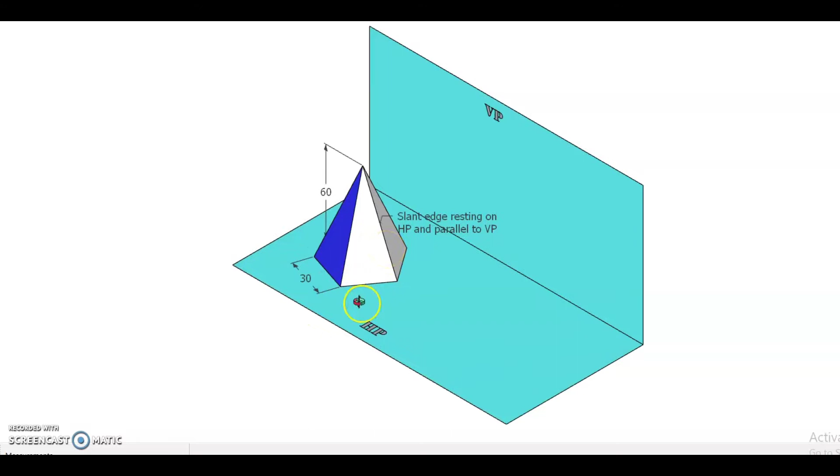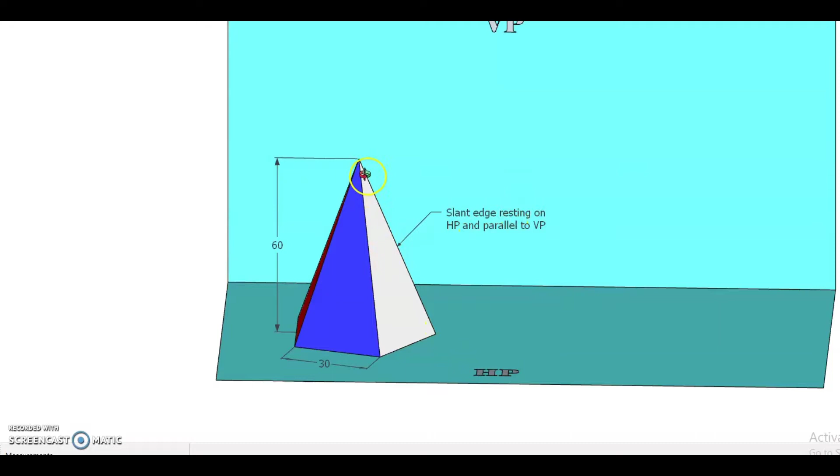Now consider a pentagonal pyramid of which the base side is 30 millimeter and axis height is 60 millimeter. It is inclined to HP in such a way that this slant edge is fully resting on HP. While resting on HP, it should be parallel to VP. So in final condition, this will appear like this one.

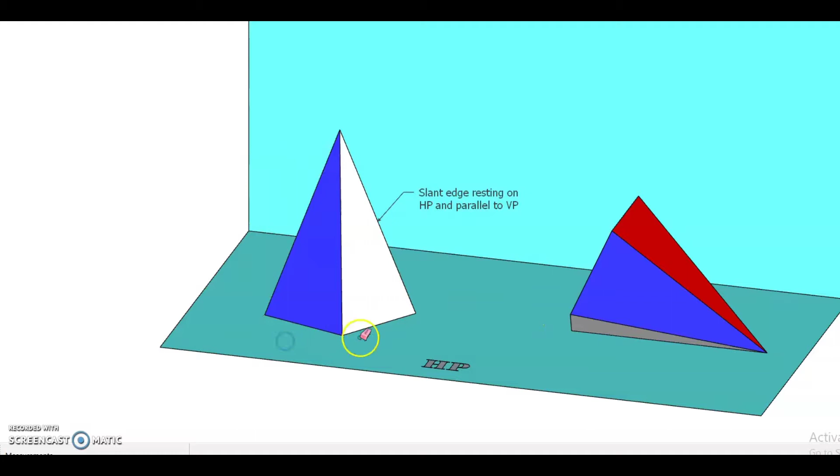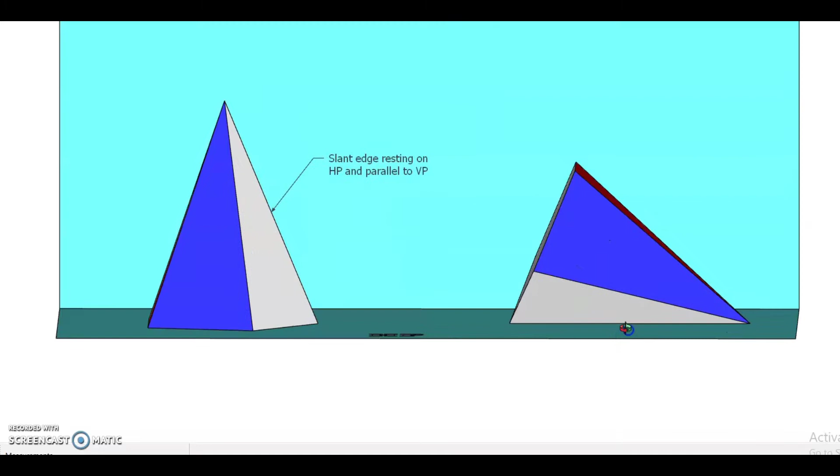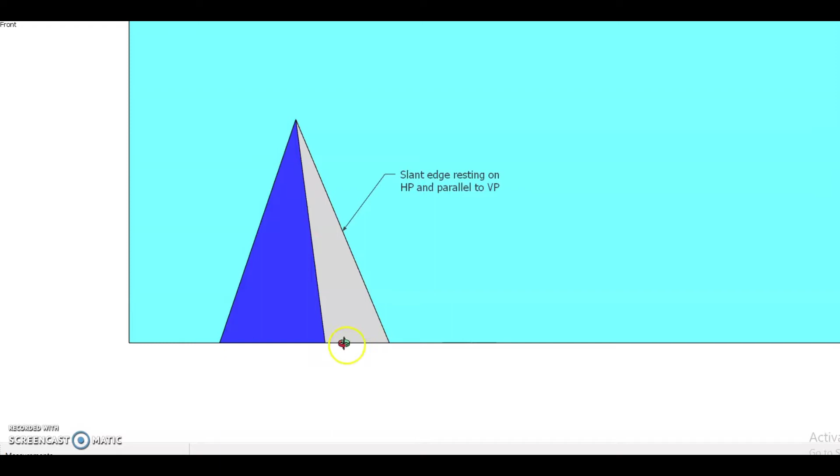So it is fully resting on one of its slant edges on HP. So this is our required condition. So initially assume that the given pentagonal pyramid is resting on its base on HP. First draw its top view, then draw its front view. Next, redraw this front view in this way, and then finally draw its top view.

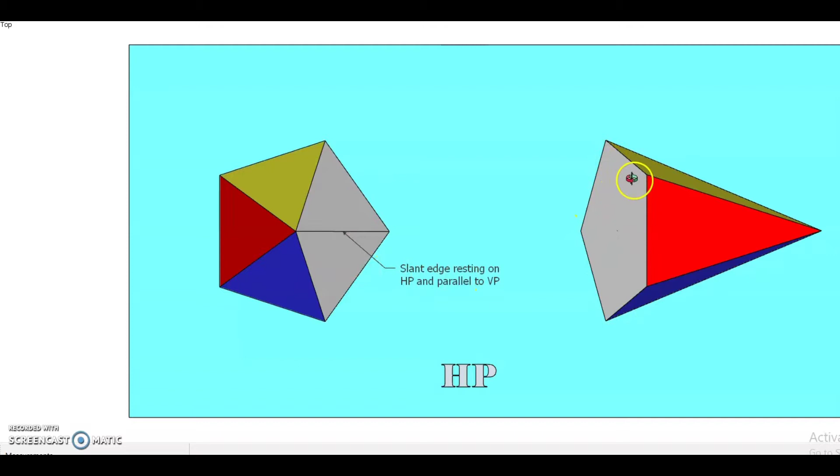In top view, yellow, red and blue colored triangular faces are clearly visible. Its base is clearly visible also. Then what is hidden? For the hidden portion, this slant edge resting on HP is not visible, which we have to show by dotted line. So this is the edge which we have to show by dotted line.

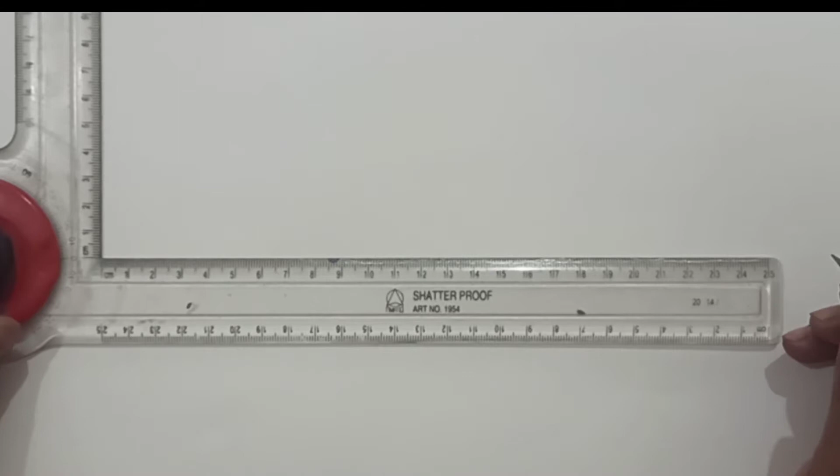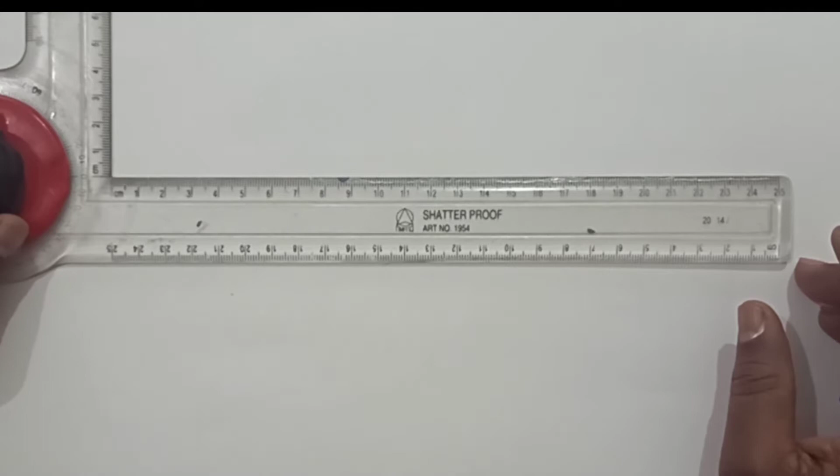So we have to draw the orthographic projections of the given pyramid. Now we have to solve a problem of a pentagonal pyramid of which the base side is 30 millimeter and axis length is 60 millimeter, resting on HP on one of its slant edges. So initially assume that the pentagonal pyramid is resting on its base on HP. Axis is perpendicular to HP. So we have to draw the top view first.

So draw this XY line. Draw this vertical line on which we have to draw one side of a pentagon. So mark the distance of 30 millimeter because the base side is 30 millimeter.

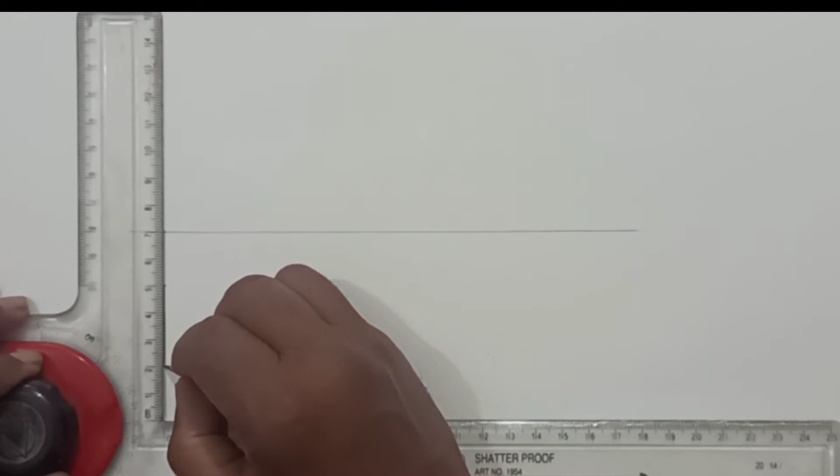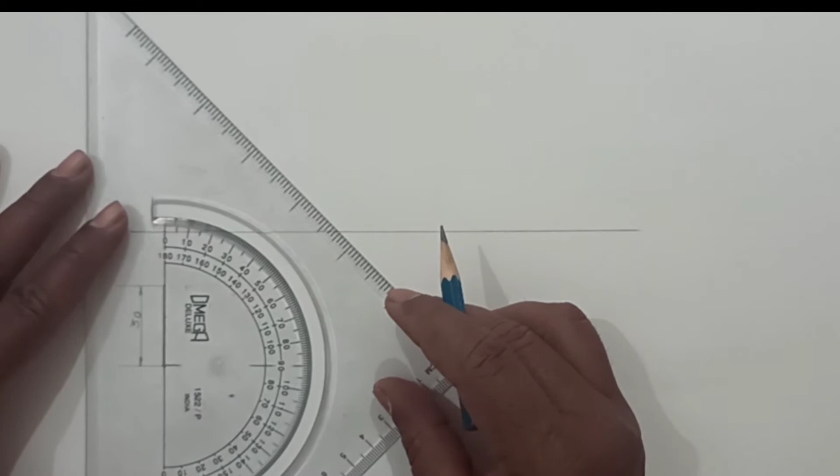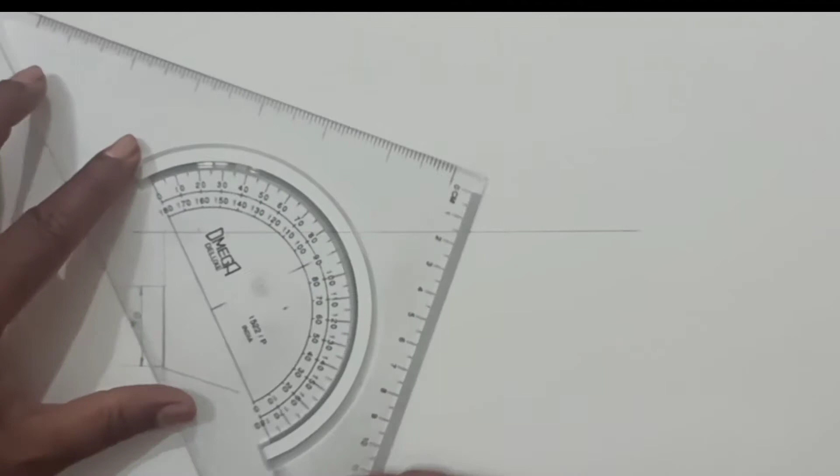Now to draw the pentagon, set an angle of 108 degrees from this side. On this line, at this angle, draw a line of 30 millimeter length. Then again consider this end of the line. Now set this angle of 108 degrees. So this will give us a length of 30 millimeter.

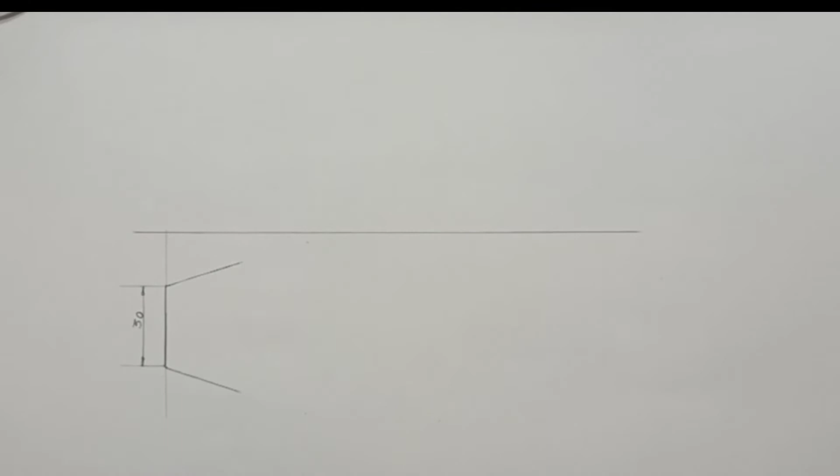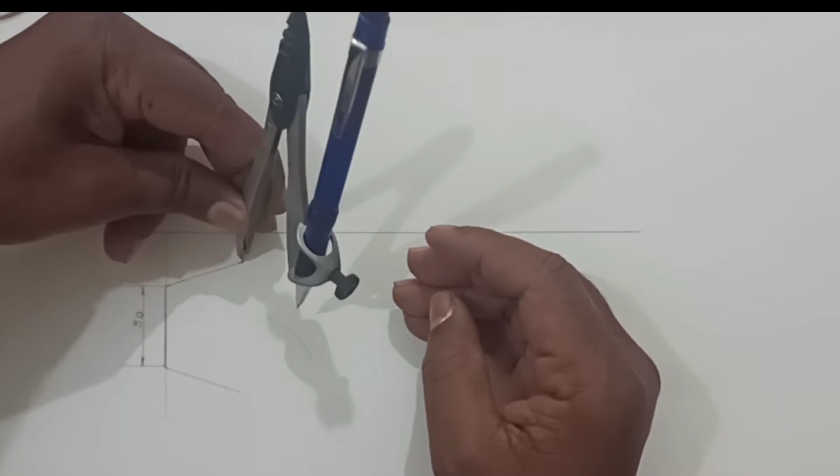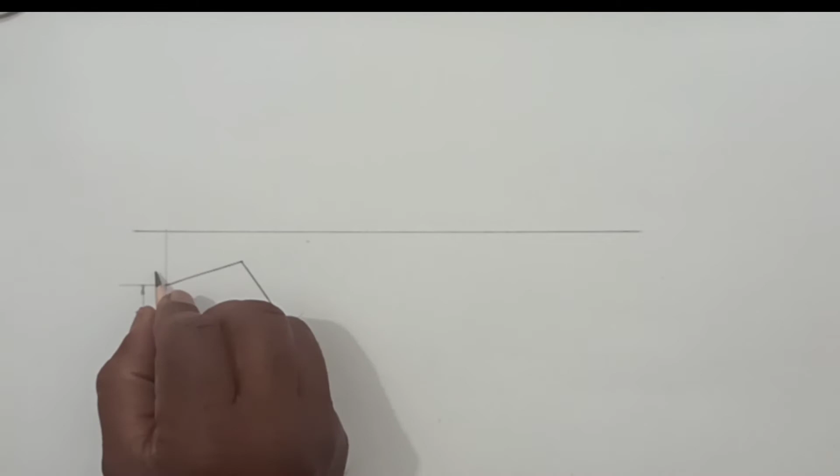Now to draw the remaining two lines, take this distance of 30 millimeter in compass and draw an arc. Again take this point and draw another arc. Now join this intersection of the two arcs to get the remaining two sides of the pentagon. So label it as A, B, C, D and E.

Now we have to locate the axis. So consider this edge and mark the midpoint. Join this point and the opposite corner by faint line. Again consider another edge. Join this by faint line. So the intersection gives us the axis position. Now through this draw the slant edges. This will show the slant edges of a pentagonal pyramid.

Now through this vertex V, draw the vertical projection line and show the axis height of 60 millimeter. Now project the base corner points. Here will be A dash, B dash. Here will be the vertex V. Then here will be E dash and C dash, and here will be D dash. Now join these points.

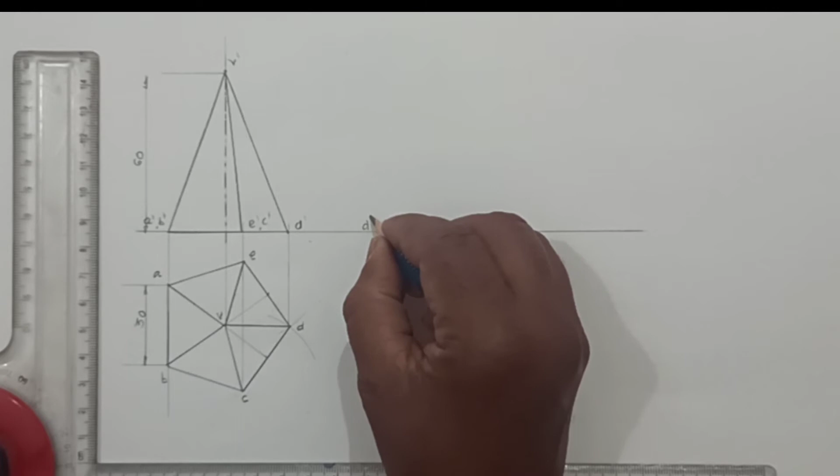And show the axis by center line. Axis height is 60 millimeter. Now this slant edge, that is slant edge VD, is resting on horizontal plane. So take this distance in compass. Mark the point here, D dash, and shift this distance, and we will get another point which will be V dash.

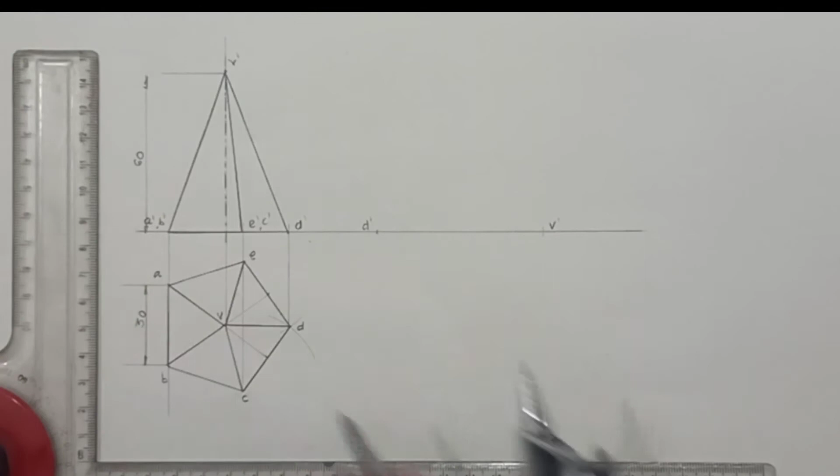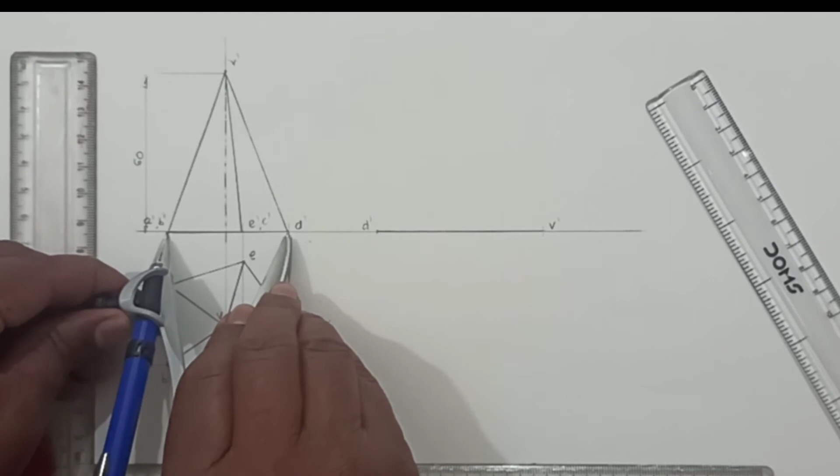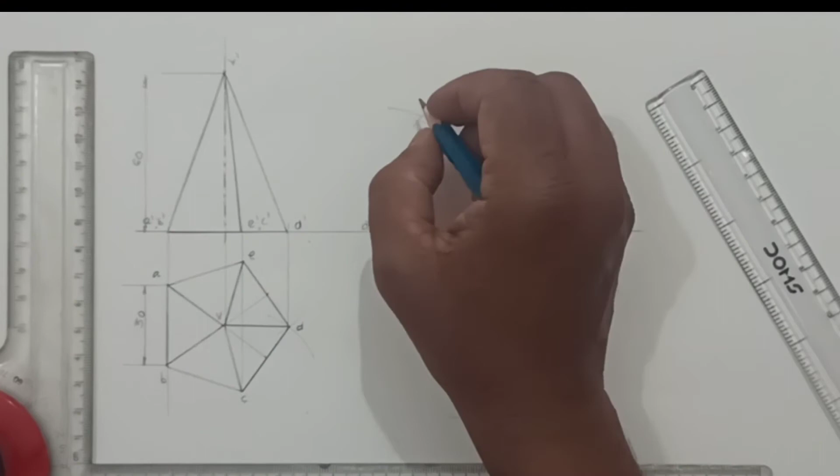So the slant edge VD is resting on horizontal plane. Now where to mark the remaining points? For this, take this distance in compass, as we are taking D as the reference point. So draw an arc. Now to locate A dash, B dash, take this distance in compass. Take this as a center point and cut it here. So we will get A dash and B dash. Join A dash and B dash by straight line.

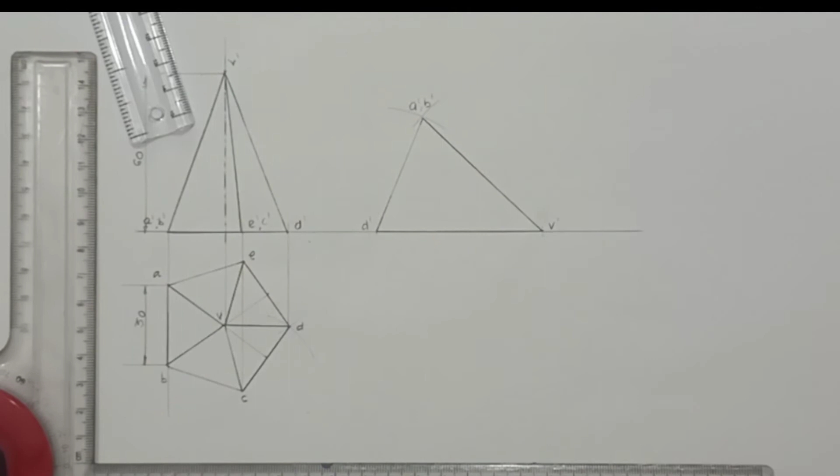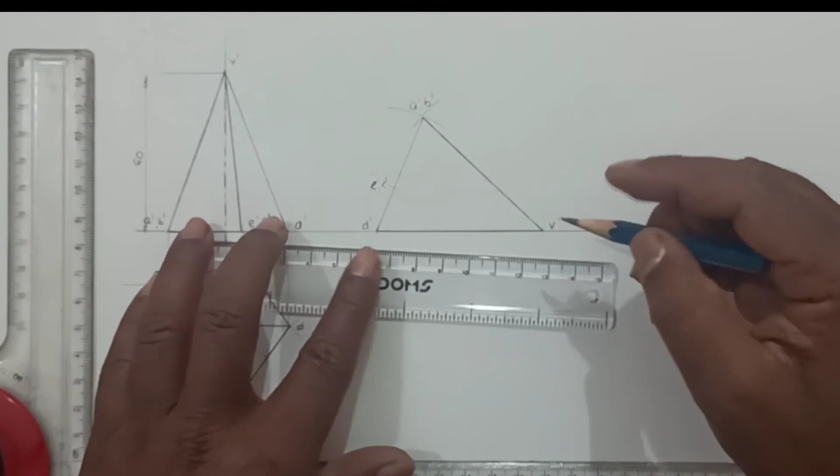Now we have to locate this point, which will lie on this AD. So take this distance in compass. We are measuring it from D, so D will be here, and mark it here. Locate the axis, which will be here. So this is point E dash and C dash. Through this, draw the slant edges, then through this vertex draw the axis.

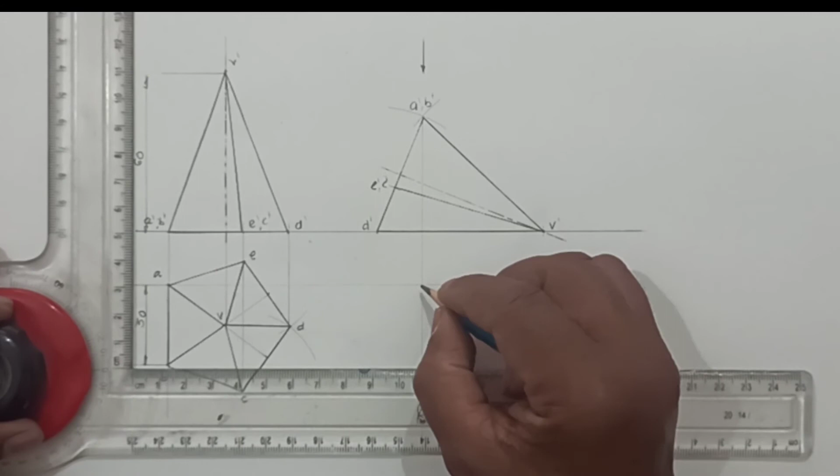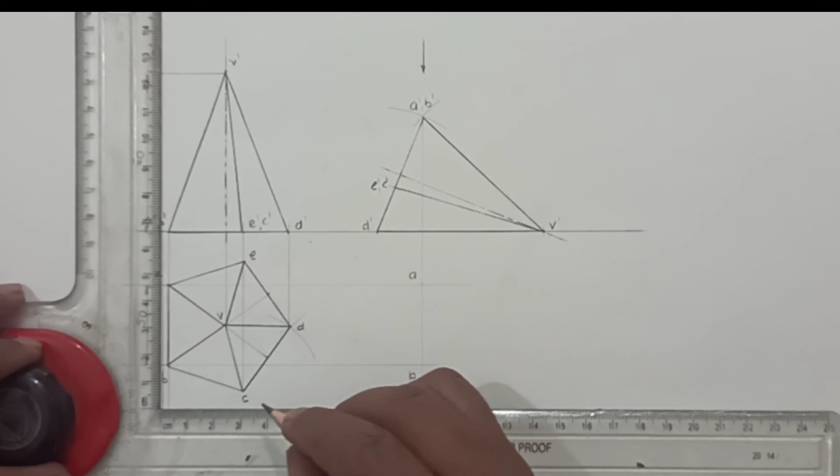Now to draw the final top view, when we look in this direction of observation, the pentagonal pyramid base is clearly visible. So we'll draw it first. First locate point A. Point A is here. Then B will lie on the same line. B is here. Then go to C. Through C draw this horizontal line, draw the vertical line, and we'll get C. Then D. Through D draw this horizontal line and this vertical line, so that we will get D.

Next is E. E is on this line, so this is E. So all 5 points of the base are located. Join them by straight lines. So the visible pentagonal pyramid base is shown here.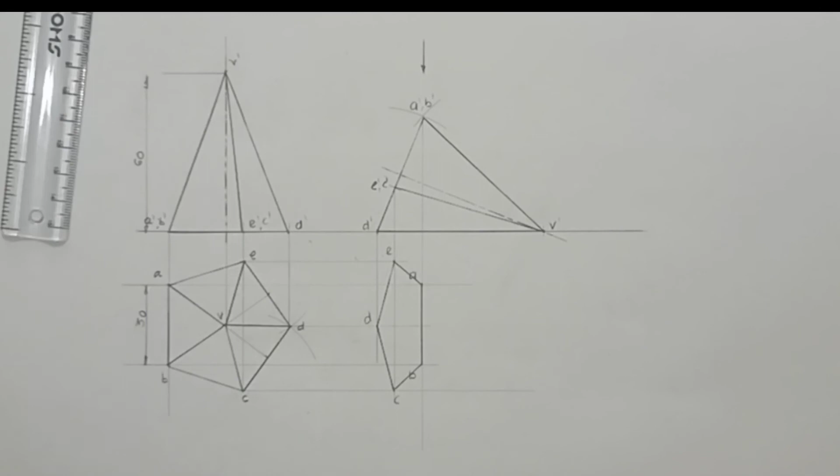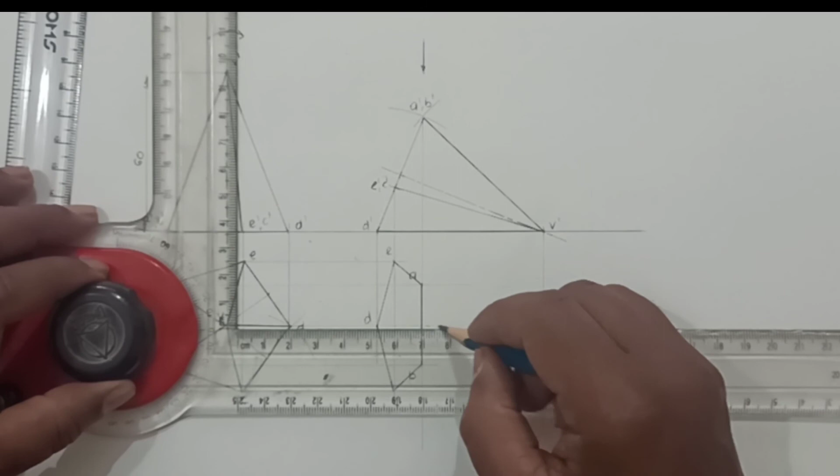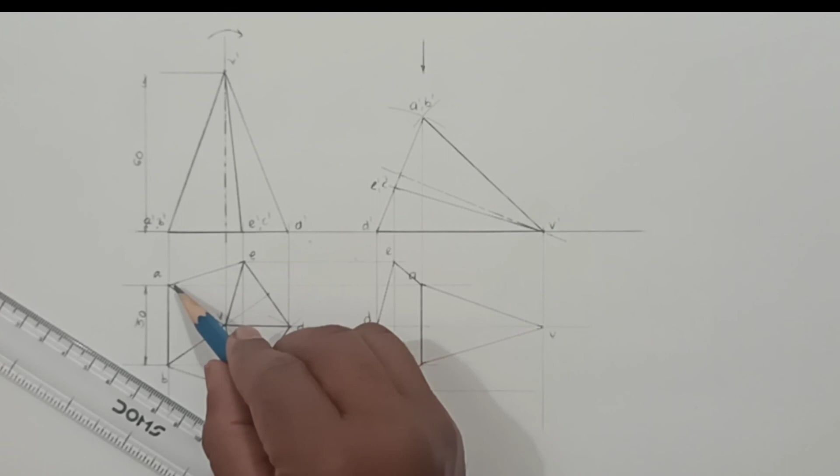Now as it is tilted in this direction, triangular face ABV is clearly visible. So draw this visible triangular face. V dash is here. We have to locate the point V. So V will be here. Now as triangular face ABV is visible, ABV is shown. Also BVC is visible. Then next, AEV is also visible.

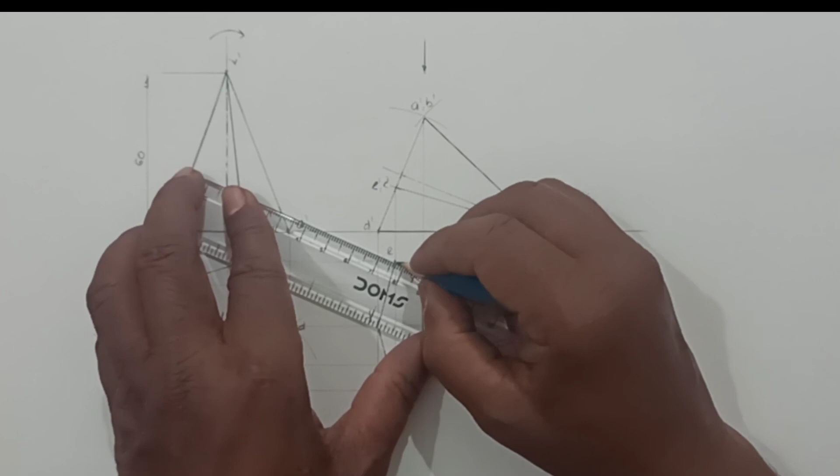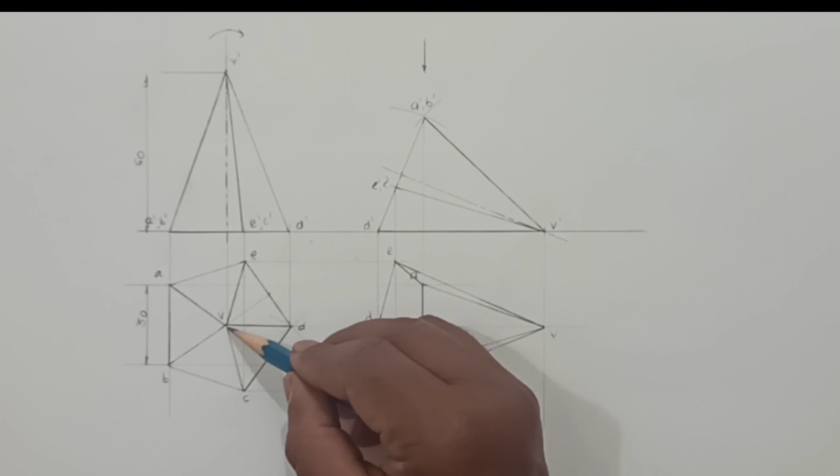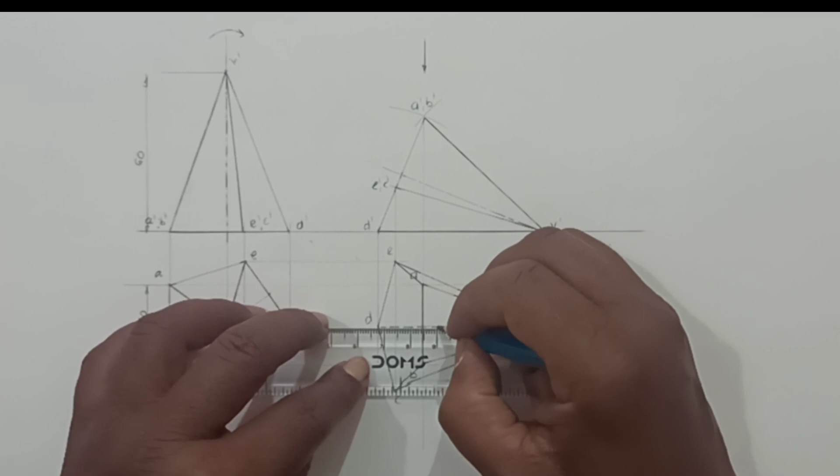Now what is the hidden portion? These 2 triangular faces are not visible, and the edge which is resting on HP, that is edge VD, is not visible. So VD is here. Show it by dotted lines to indicate the hidden edge. So our solution is completed. Control the line work. Draw the projection lines very faint, and other lines should be dark.